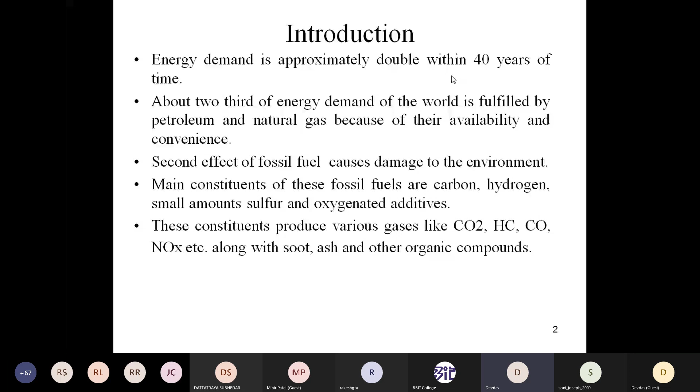We already seen about nowadays, some years before, that we were having the individual pump system in case of diesel engines. Now, since the last 4 to 5 years, all vehicles have been converted into CRDI, common rail diesel injection, which is the modification of the earlier individual pump injection system.

Second, in case of petrol engines, earlier it was a carburetor through which petrol was supplied to the engine. Since after 2000, the carburetor version has been phased out, and in its place the multi-point fuel injection system, MPFI, has been introduced. This system is now available in petrol or gasoline engines. This is the second modification we are doing.

Now the third modification. If you see the latest vehicles around 2021, like the Kia vehicles, the advanced models, the latest version of the Creta petrol, the Kia Sonet or Seltos, in the Seltos they have jumped from the MPFI system to the GDI system. GDI is gasoline direct injection system. At present, Kia, MG Hector, or the latest Creta introduce gasoline direct injection inside the cylinder, so that it controls more of the pollution.

Now, advanced emission technologies such as diesel oxidation catalyst are being introduced into the system, along with diesel particulate filters and selective catalyst regeneratives that have been developed. These are some of the factors in respect to emissions.

You already observed that this diesel particulate filter or selective catalyst regenerative system is introduced from the exhaust valve to the silencer. In between, this system is attached, particularly in the exhaust system of the engine, so that the pollutants coming out to the atmosphere have less pollutant effect.

Now, the next topic is the concept of dual fuel engine. What do you mean by dual fuel engine? In a dual fuel engine, both types of process exist simultaneously. Now the question arises, what type of process am I talking about? Both types, which both types am I talking about?

That is the carbureted mixture of air and high octane index gaseous fuels, which is compressed like a regular diesel engine. So what happens is a carbureted mixture of air and these high octane index number gaseous fuels is supplied to the engine, just like in the normal working.

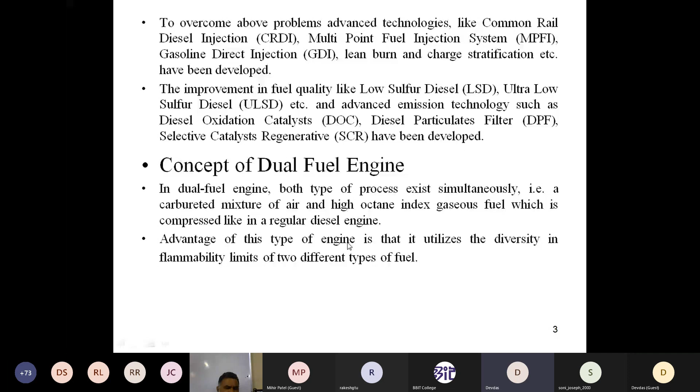This is not a hybrid. It's the mixture of LPG or hydrogen and air as one gas, and another gas is the diesel. That's why we call it the dual fuel engines. Now diesel has a different flammability limit, and hydrogen has a different flammability limit.

We can use both flammability limits in these dual fuel diesel engines. Gaseous fuels like CNG, LPG, biogas, producer gas, hydrogen, and fumigated liquid fuels like gasoline and methanol in air are used as secondary fuels. What I'm talking about is fumigated liquid fuels like gasoline. If we fumigate the gasoline, we can use this fumigated gasoline fuel as one of the energy sources.

Along with the diesel, we can use the gasoline vapor also, fumigated gasoline, along with the diesel. That's why, as I talked about earlier, lean burn and charge stratification. In case of charge stratification, we use some part fumigated liquid gasoline and some part diesel. Methanol can also be used as a secondary fuel. So many options are available now in front of us.

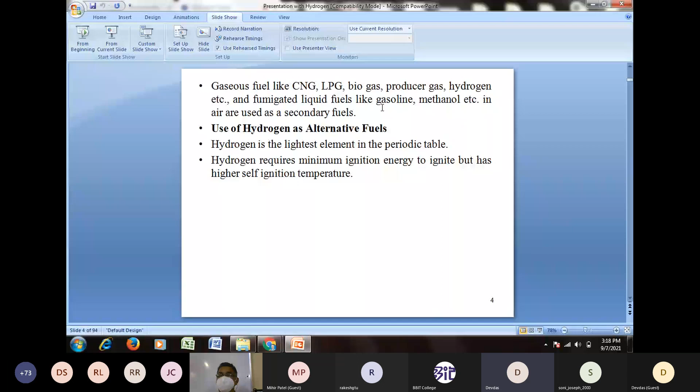Now, combustion in dual fuel design: how the combustion takes place when the liquid fuel and gaseous fuel are both simultaneously available in the engine. It consists of diffusive burning of diesel fuel and homogeneous burning of gaseous fuels, which strongly affect each other. If you know about this burning, how combustion takes place in case of pure diesel or pure petrol, yeah.

Suppose I ask you a question: which type of combustion process takes place in case of the petrol engine or gasoline engine, or in case of the diesel engine? We can call them the Otto engines or the diesel engines. We can say it like this also. You know the basic difference between the Otto engine and diesel engine.

In case of the Otto engine, it is the mixture of fuel and air in homogeneous form, while in case of diesel, it is a heterogeneous mixture of fuel and air. So this is the basic difference - one is homogeneous, second is heterogeneous.

Now in this dual fuel engine, we have the advantages of both - the mixture is heterogeneous in nature, and also homogeneous in nature. Both properties of Otto and diesel we can utilize in the dual fuel diesel engine. That's why it consists of diffusive burning of diesel fuel and homogeneous burning of gaseous fuels which strongly affect each other. It shows combined aspects of the diesel and Otto cycle. I already explained the combustion process along with unique features of dual fuel.

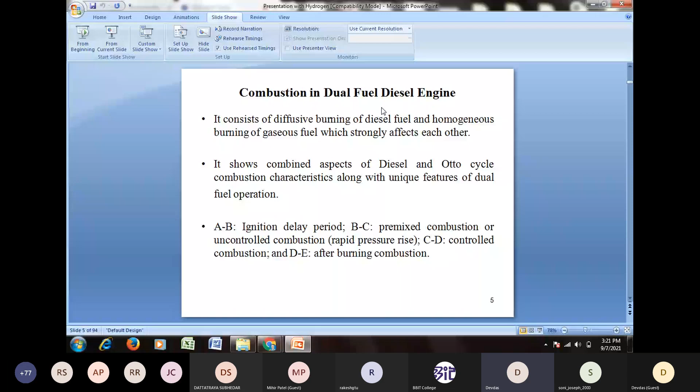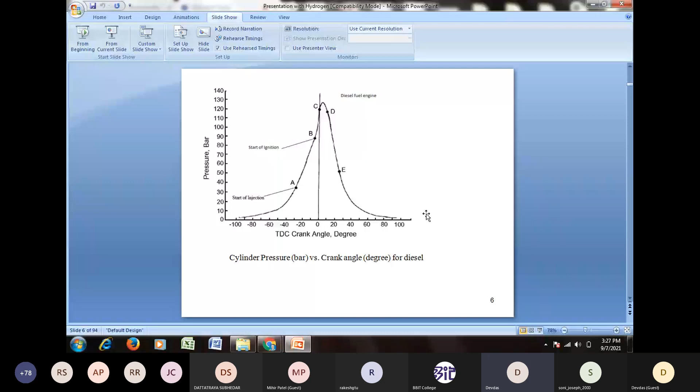On the other hand, the combustion in dual fuel diesel engines using pilot diesel fuel as an ignition source occurs in five stages. Earlier we had four stages; now here we have five stages.

First is the pilot ignition delay, which I already explained. I used the word 'pilot' here, which was not used in the previous case. Pilot fuel: why do we call diesel the primary or pilot fuel? Because diesel fuel is used to start combustion. Diesel fuel ignites first, and then it ignites whatever hydrogen gas is available inside the cylinder. I already told you hydrogen has a high self-ignition temperature, so it does not ignite on its own. We require an ignition source, and in this case diesel is used as that ignition source. That's why we call it pilot diesel, and the pilot ignition delay means the ignition delay of the diesel fuel.

Second is the pilot pre-mix combustion. By 'pilot' we mean whatever fuel, that is, the diesel accumulated inside the cylinder during the ignition delay period, undergoes pre-mix combustion.

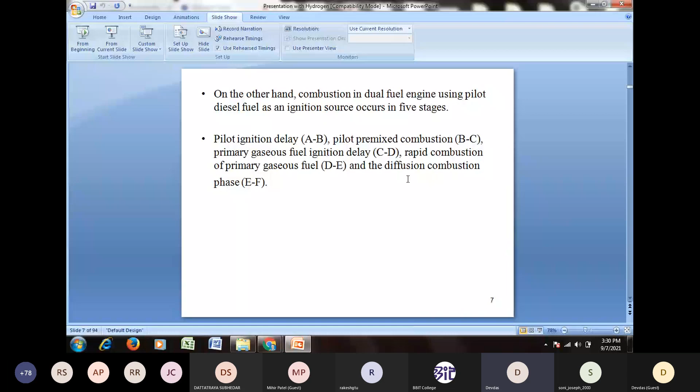Now see, A to B is the pilot fuel ignition delay, just like in the case of diesel. Diesel already takes a certain time to ignite, so A to B is the ignition delay of the diesel. B to C is the pilot pre-mix combustion.

Now C to D is the further ignition delay of the gaseous fuel, because gaseous fuels have a higher ignition temperature.

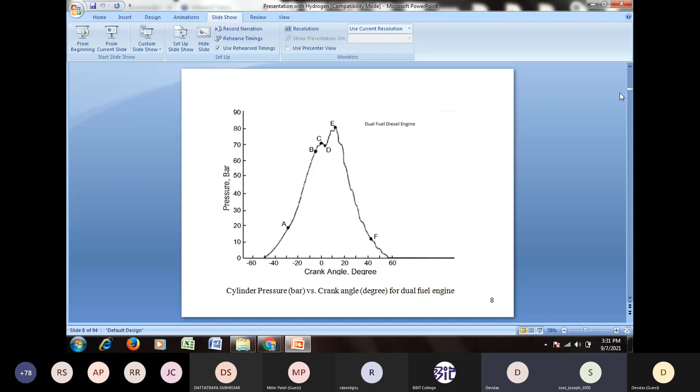Now see this, A to B, I already explained the ignition delay of the diesel fuel. B to C is the pilot pre-mix combustion.

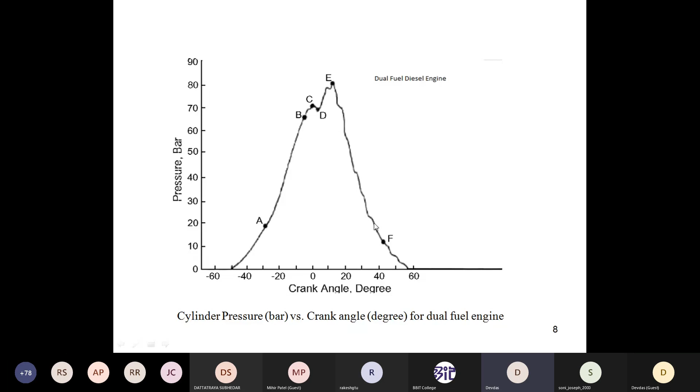E to F, again, the after burning is there. That's why B to C is one phase of combustion, C to D is the second, D to E is the third, and E to F is the fourth. So because of this, we are having five stages in case of the dual fuel diesel engines.

Now, in principle, there are three behaviors of combustion that follow in series in dual fuel diesel engines, one by one. First combustion process is the single combustion, second is simultaneous combustion, and third is the successive combustion. These are the three basic stages of the combustion.

After burning, we do not get much power, and we also do not get power from the ignition delay, so we are not contributing from it. When combustion started from point B onwards up to point E, there are three phases of combustion in between: B to C is single combustion, C to D is ignition delay, and then the simultaneous combustion and the successive combustion follow. These are the three phases of combustion in dual fuel diesel engines.

The dual fuel engines have more advantages than diesel engines. In a dual fuel engine, no modification in hardware is required in the existing engine design. Whatever the design of the engine is there, we do not need to modify it in excess.

Another advantage is flexibility, meaning we can switch back to pure diesel mode as and when required. If hydrogen is not available, we can directly shift to diesel without any effort, without any modification done into the engine.

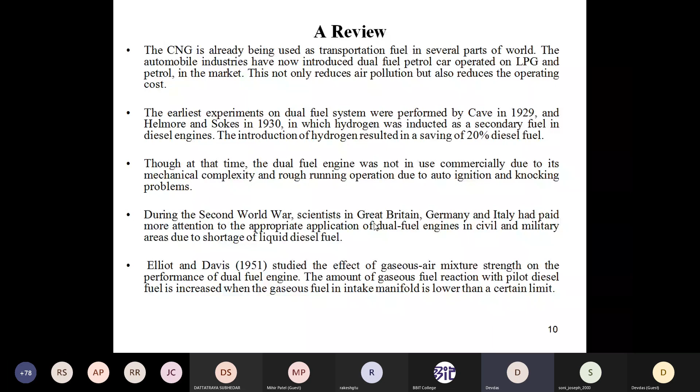Elliot and Davis studied the effect of gaseous air mixture strength on the performance of dual fuel engines. Now, what about CNG? It is a mixture of several gases. Compressed natural gas is a mixture of several gases with methane as the primary constituent, about 85 to 90% methane. The remaining constituents include ethane at an average of 78% and other components.

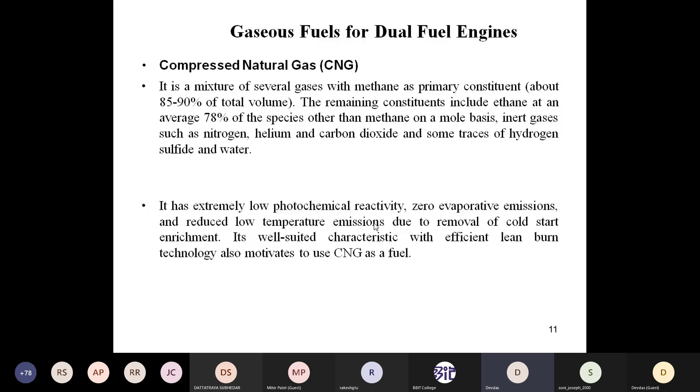CNG has extremely low photochemical reactivity, zero evaporative emissions, and reduced low temperature emissions due to removal of cold start enrichment. Now LPG has a higher octane index number, and combustion of LPG takes place practically in a uniform fuel-air mixture. Propane and butane gases are heavier than air. The most dangerous fact associated with LPG is that if LPG leaks and mixes with air, and the mixture temperature reaches 500 degrees centigrade, it becomes explosive.

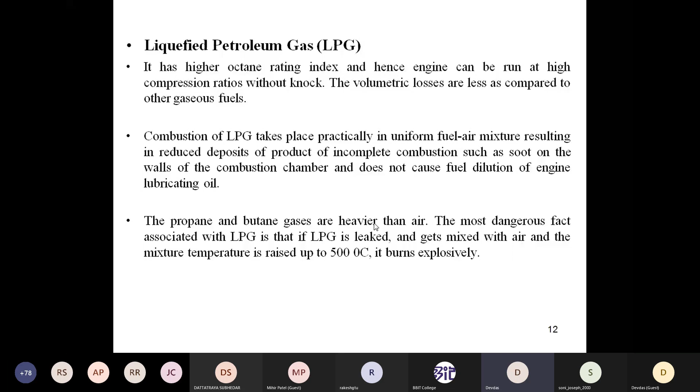Biogas, we already know about. Biogas is rich, with 55 to 70% methane, and some part hydrogen sulfide, carbon dioxide, and some hydrogen as well. The presence of hydrogen sulfide, water vapor, and halogenated hydrocarbons also worsens the quality of the lubricating oil, causing it to deteriorate.

Now, producer gas is mainly a mixture of carbon monoxide, hydrogen, nitrogen, and carbon dioxide.

It can be produced by partial combustion of solid carbonaceous fuels, such as wood, charcoal, agricultural waste like rice husk, and coke in a gasifier. This means we can produce producer gas with the help of rice husk, coke, agricultural waste, and charcoal or wood.

Now, what about hydrogen? Hydrogen has all the desired qualities of a unique fuel, all the qualities we require, which make it likely to become an ultra clean fuel, not just clean but ultra clean. From various technical and ecological points of view, hydrogen seems to be the most suitable petroleum alternative in IC engines.

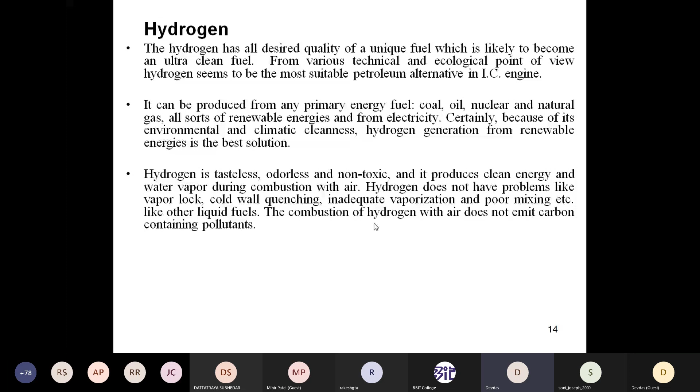Now I have compared different properties of the other gases available versus hydrogen, such as the lower heating value. See here: 42,800. Lower heating value means the calorific value. What you observe here is nearby 43,000 calorific value in kilojoules per kg.

LPG is around 46,000, CNG 47,000, producer gas only 3,500 to 6,000, biogas 20,900. In case of hydrogen, it's about 1,20,000. So much energy lies in hydrogen, 1,20,000, compared to 42, 46, 47, or only 6,000 or 20,000 for the others. We are getting 1,20,000 kilojoules per kg of energy out of it.

In this case also, for the lower heating value by volume, hydrogen is about 2,570 while CNG is about 36,000. This is in terms of volume and normal metric conditions.

We can also see auto-ignition temperature and the flammability limit: 0.6 to 7.5 for diesel, LPG 2.1 to 9.6, and here 4 to 75 percent. This means, by volume percentage in air, if hydrogen is present at 75% in a fuel-air mixture, it can still ignite, but other fuels do not ignite at that level.

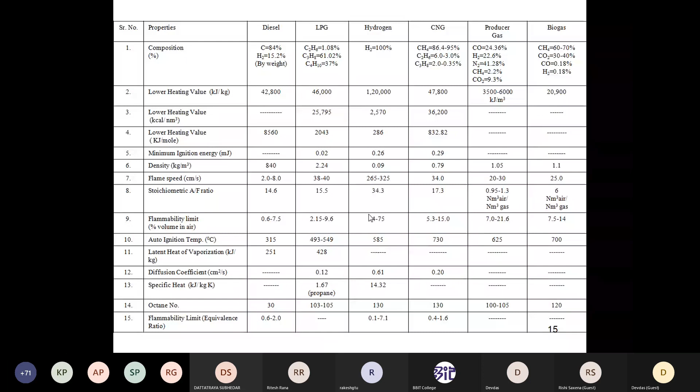Then, how do we assess performance? How do we show that hydrogen is useful, and how do we compare the dual fuel engine to show it gives better performance? Not just by discussion, but by going through experimental work. So we also carried out experimental work on this.

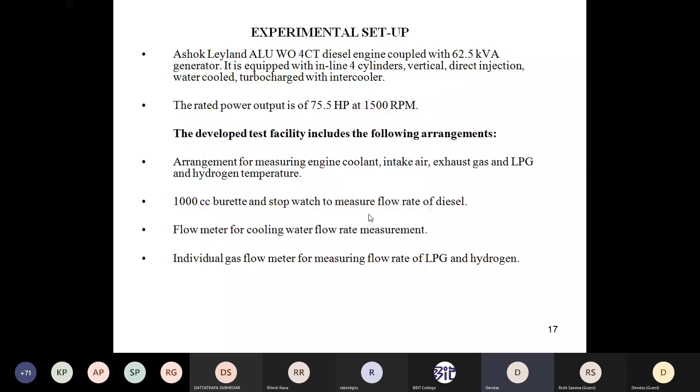Then the hydrogen goes inside through the air inlet system. Air comes in from this side, and hydrogen is fed in, where it mixes with the air coming from the inlet manifold. This mixture then goes to the engine, and from the engine it goes out through the exhaust.

We can use the exhaust emission method to measure the exhaust. So these are the setup details for this system.

So whatever data is there gets saved in the computer, and from the computer we get the readings and all the things. So this is the basic arrangement of the hydrogen system.

Now what is there? This is the hydrogen. The red one is the hydrogen cylinder. From this hydrogen cylinder, hydrogen is coming.

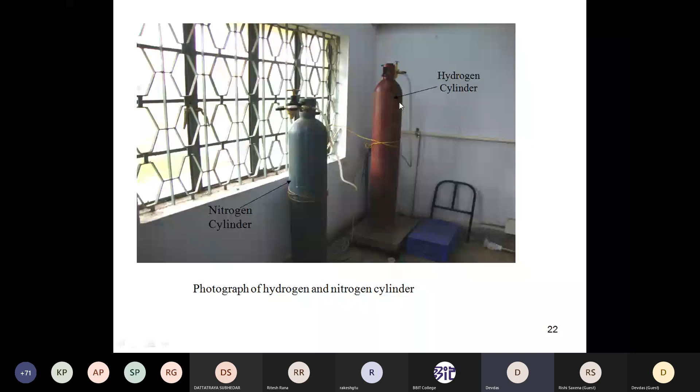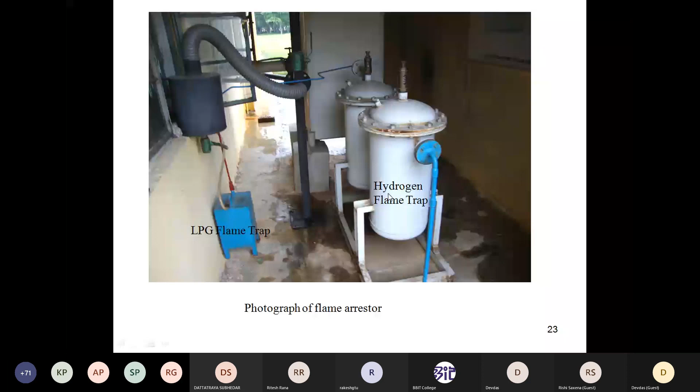Now, hydrogen is coming to this flame trap. This is the flame trap that we call the hydrogen flame trap. From the hydrogen flame trap, it goes to the meter. We are measuring the amount of hydrogen we are supplying into it. This is the volume flow meter of the hydrogen.

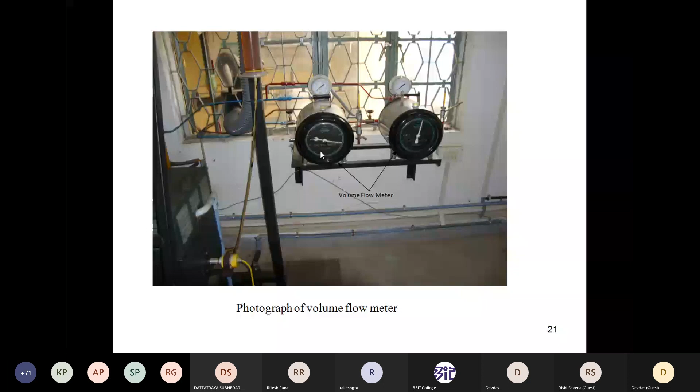Then this is the engine into which we are supplying it. This is the flame arrestor, the blue one. This blue line is the pipeline through which the hydrogen is coming and inserted into the engine. And look, this is the inlet manifold. We are injecting hydrogen in the inlet manifold, and from the inlet manifold hydrogen goes to the engine and the engine gets started.

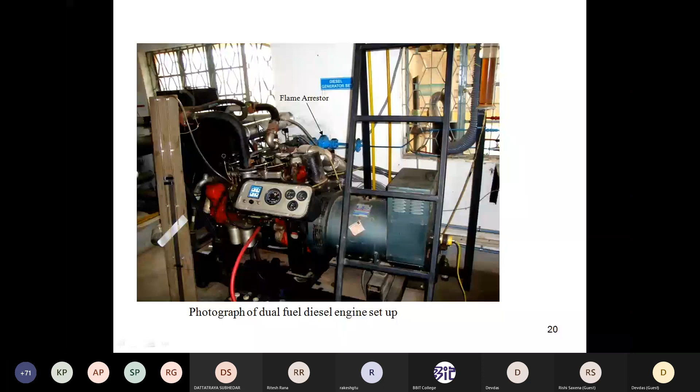This is the pressure transducer charge amplifier. This is the four cylinders, 1, 2, 3, 4. This is the pressure transducer in between it. This is the form of it.

How did we do the experiment over it? First, we ran the engine with the help of pure diesel only. What were the performance parameters of the diesel engine? The diesel engine shows we can note down readings with respect to fuel consumption, with respect to load, with respect to the pollution coming out, all with respect to diesel.

Then we consider diesel plus hydrogen. In case one, the engine runs with diesel engine only. In case two, the engine runs on diesel as the primary fuel and hydrogen as secondary. So in the second case, hydrogen is also used as a secondary fuel, while in case one only diesel is used as fuel.

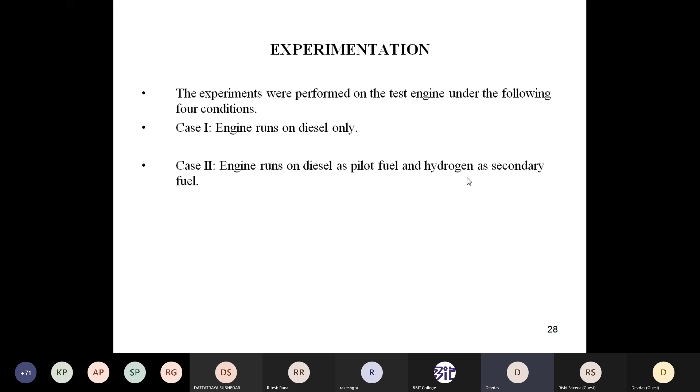At what load percentage are we using diesel and hydrogen, or how much percentage of hydrogen are we supplying? From 5% to 50% hydrogen we are supplying. Why not go beyond 50% hydrogen? Because if the percentage of hydrogen intake is more, then the problem of knocking arises. The knocking problem becomes more severe, hence we restrict the percentage of hydrogen up to 50%. Otherwise, knocking damages the engine, so that is never desirable.

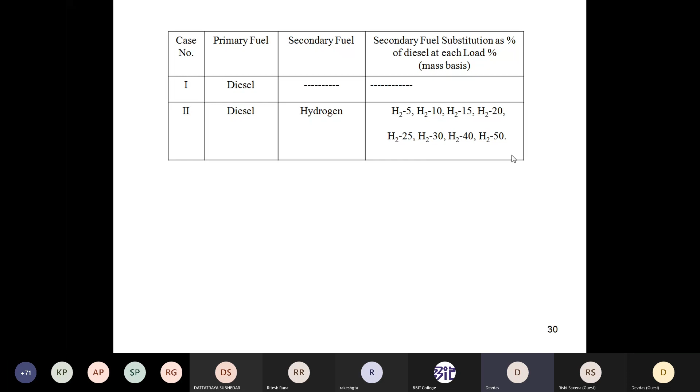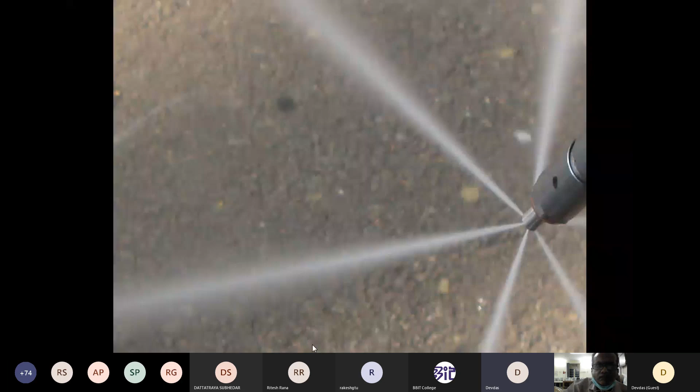Now, when the diesel goes to the intake, I have made a pictorial picture of the diesel. This is the spray, called the spray zone, where diesel is injected inside the cylinder. How does the diesel get separated into different zones? This is the center, with an elliptical shape that we call the core shape, where diesel is available in liquid form.

Now, surrounding this, what happens? Part of the diesel gets vaporized because of the heat available inside the cylinder. It is surrounded by the core fuel. In the premix diffuser region, the vaporized fuel gets mixed with the surrounding air nearby the injector, so they mix together.

After that, what happens? The propagation of the gaseous fuel also takes place. The gaseous fuel also catches fire. And what happens is the propagation of the gaseous fuel-air mixture - it gets propagated inside the cylinder, the flame gets propagated inside.

This portion is the end portion of the charge which is yet to be burned, that's why it's called the unburned gaseous fuel. As the flame increases, it moves from this side to this side, and this gets compressed because of the high pressure developed by the combustion of fuel inside the cylinder.

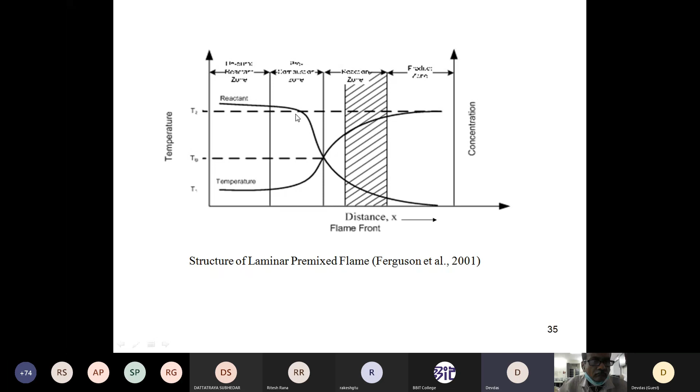Now, what I already told you about the ignition delay - then how do we begin the ignition delay here?

Ignition delay is nothing but the gap between the start of injection and the start of combustion. That gap is called the ignition delay. Now, how do we calculate that?

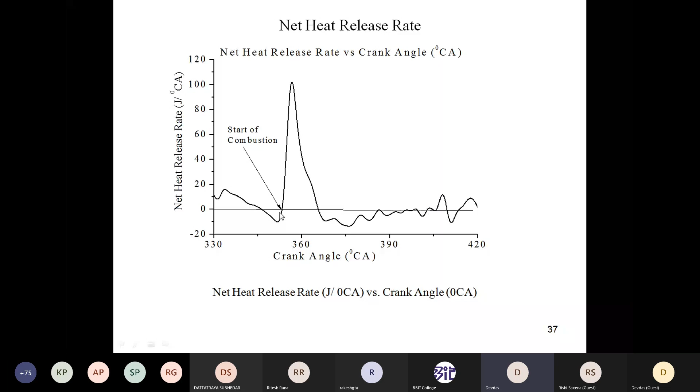So we can calculate the start of combustion by means of the rate of pressure rise, and also by means of the net heat release. In this case, it's not the minimum point but the zero point — from here to here, where the zero point comes, the start of combustion is there. While in the other case, the minimum point is used as the start of combustion.

From here we can get the thermodynamic analysis. As a mechanical engineer, you'll know that the polytropic index comes into the picture because the compression process is not isentropic — a certain amount of entropy changes, so the process is polytropic. Then how do we calculate it? On the basis of the polytropic index, we find the polytropic index of the situation inside the air.

The polytropic index can be measured from the start of combustion to the end of compression. During the compression process, we measure the slope of the process to use as the polytropic index.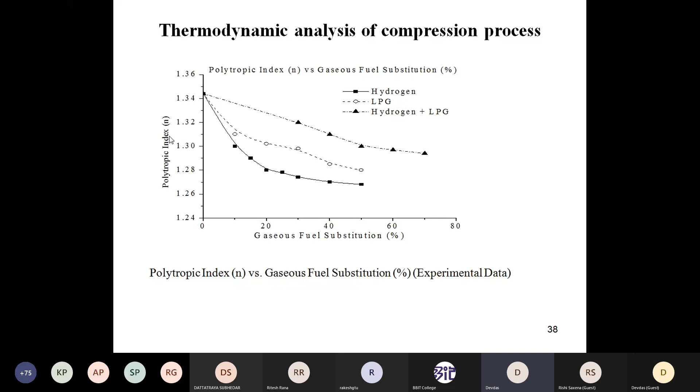We observed that the polytropic index is nearby one, more than 1.34 and just below 1.36. But in all cases with hydrogen and LPG, hydrogen plus LPG, we observed that the polytropic index gets reduced — it decreases.

Now, how do we calculate the linear regression analysis? We can mathematically calculate the ignition delay, and also calculate the mean temperature developed inside the cylinder with this formula. We have the pressure from the pressure transducer, and with the crank angle position, we can calculate the temperature or volume of the system. So we calculate the temperature using the pressure and volume, and get the temperature inside the cylinder.

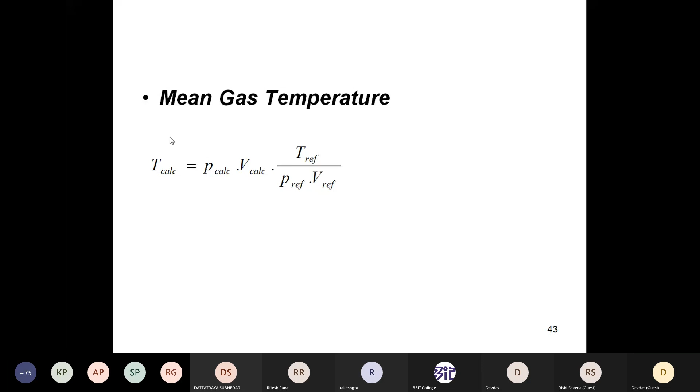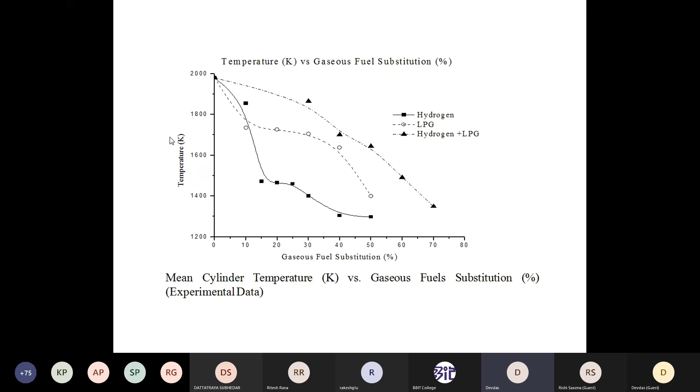We observe that the cylinder mean temperature gets reduced as the gas substitution increases, because as the polytropic index reduces, the temperature of the gas also gets reduced. We also observe that the pressure gets reduced as we work with gas substitution.

The oxygen concentration — because we replace the air with the help of hydrogen — what are the effects of hydrogen substitution on oxygen concentration? We observe that the oxygen concentration gets reduced as the percentage of hydrogen increases. The addition of hydrogen replaces the air, so the quantity of air supplied inside the cylinder is less, which indicates that less oxygen is available inside the cylinder.

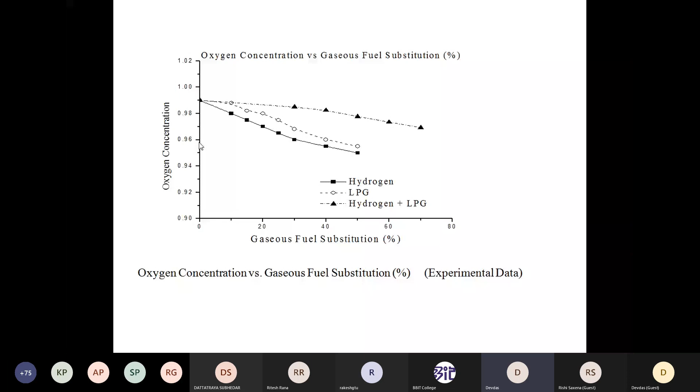Regarding ignition delay: after a certain time, ignition delay increases, then it reduces. From the diesel, the ignition delay increases, then it reduces here.

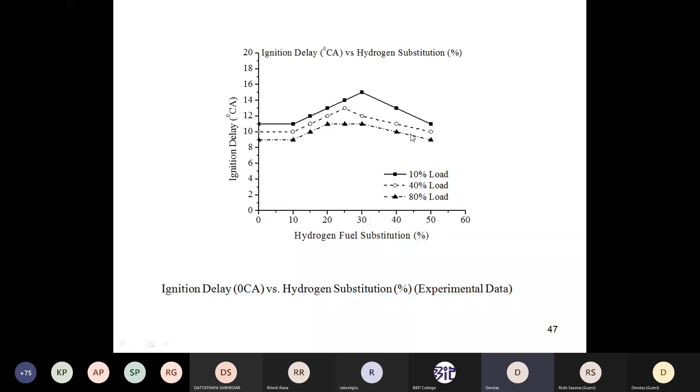Now at low load condition, the brake thermal efficiency for case 2 means the mixture of hydrogen and air. Why does it indicate that at low load conditions, the brake thermal efficiency for case 2 as well as case 3, case 1 operations are low? At low load condition, a small pilot fuel quantity makes a lean flammable mixture. Unburnt gases remain in the mixture and the rise in temperature of the unburnt charge in the burnt zone does not reach up to the ignition temperature. Hence, reaction rate in the reacting zone of the flame front is slow. Thus, gaseous fuel-air mixture is partially oxidized in the reaction zone where combustion takes place. Therefore, accumulation of unconverted gaseous fuel and carbon monoxide increases due to incomplete combustion.

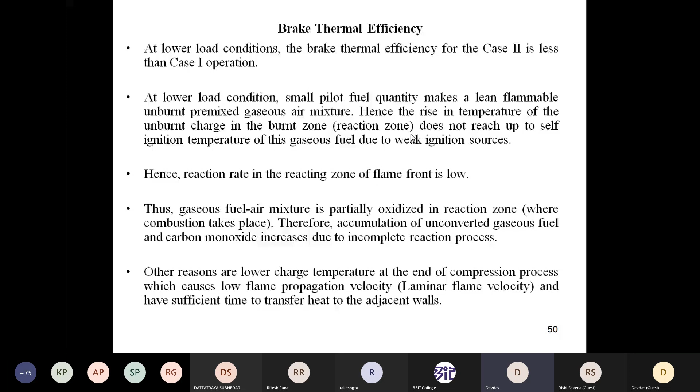While in case of gaseous fuels, if you compare, what you observe is why this is so - this is due to the large quantity of pilot diesel fuel that leads to a stronger ignition source. This reduces delay period due to uniformity in mixture formation, which accelerates the pre-flame reactions and hence gives more complete and rapid combustion of the fuel. Because of that, the efficiency is more.

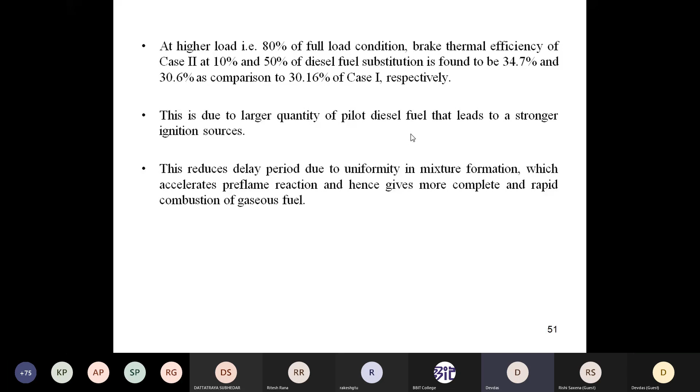BSFC, we already know that BSFC is the inverse of the brake thermal efficiency. As brake thermal efficiency increases, this gets reduced. At a certain load condition, the brake specific fuel consumption gets lower as compared to that of diesel also.

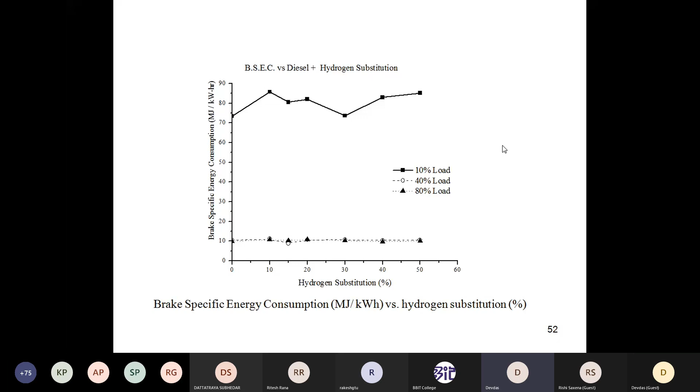Now, brake specific fuel consumption is an important parameter for the performance of the engine, which shows its ability to convert fuel into work. At 10% of load condition, the fuel consumption is 33% higher than the pure diesel engines. Meaning at low load condition, the fuel consumption rate is 33% more than the pure diesel engines. This we like to note.

The temperature of the charge at the end of compression is the most critical parameter for initiation of combustion in CI engines. The presence of hydrogen increases the heat transfer rate and hence cooling effects are there. Cooling losses are more. The pilot diesel fuel does not get sufficient time to complete pre-flame reactions. Therefore, in order to produce the required power, a large amount of diesel was supplied.

What I say is that the fuel, hydrogen, we can control - supply of hydrogen is in our hands, we can control according to the need. But what about diesel? Diesel is automatically controlled by itself depending on the speed of the engine and depending upon the load on the engine. So the amount of fuel can be automatically controlled by the pump there. That's why they mention the pilot diesel does not get sufficient time to complete pre-mixed, pre-flame reactions. Therefore, in order to produce power, it is supposed to have sufficient time to complete pre-flame reactions.

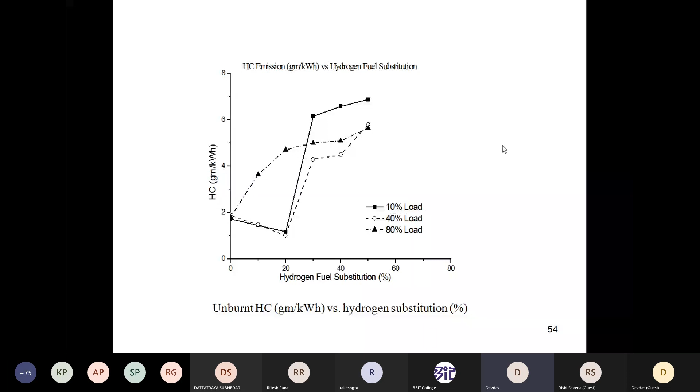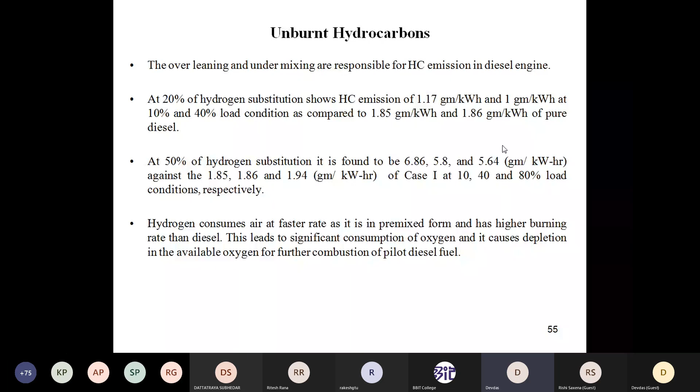Hydrogen consumes air at a faster rate as it is a premixed form and has a higher burning rate than diesel. This leads to significant consumption of oxygen, and since it consumes oxygen at a faster rate, the oxygen available for the pilot fuel is reduced. The same graph applies here.

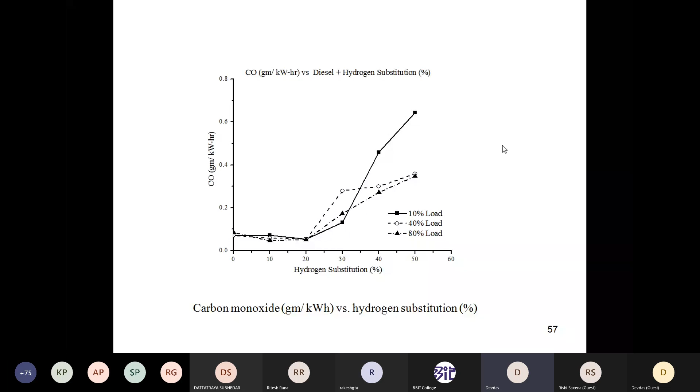The carbon monoxide - what you observe is that the carbon monoxide percentage, after a certain time, gets increased when hydrogen is used. The same logic applies because the formation of carbon monoxide depends on post-oxidation reactions. For very lean mixtures, some of the CO may not be utilized or oxidized further due to failure of the combustion process to cover the whole charge, and relatively slow reaction process. These are the responsible factors for carbon monoxide production.

Initially, the percentage of CO is reduced up to 20% of hydrogen substitution, then it increases sharply at all low load conditions. If hydrogen percent is low, then CO formation is also low. The CO emission at 80% load conditions due to 20% hydrogen substitution is found to be this much. These are the values obtained after that.

The higher concentration of hydrogen makes the gaseous air mixture richer due to replacement by hydrogen in the intake. As soon as ignition starts after the ignition delay period, spontaneous combustion occurs in a higher percentage of hydrogen. Hence, the diesel fuel is further subjected to higher combustion temperature in an atmosphere of shortage of oxygen. This leads to fuel cracking and production of carbon monoxide.

The excess availability of air, as in case 1, reduces the reaction rate due to reduction in temperature.

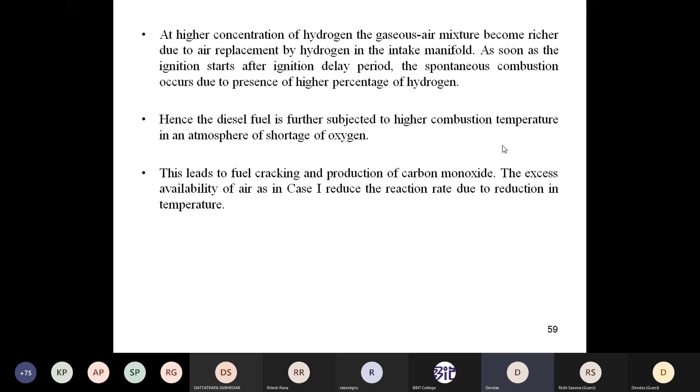This CO result leads to NOx, and how does NOx formation take place? HO2 plays an important role in enhancing the conversion of NO to NO2. HO2 radicals can be formed by H plus O2 plus molecules.

The HO2 rich mixture reacts with NO molecules in high temperature combustion regions and enhances formation of NO2. So NO2 is obtained when the HO2 rich mixture reacts with NO molecules from the high temperature combustion regions, enhancing the formation of NO2.

At a suitable temperature, the unburned fuels containing hydrogen could oxidize in the presence of O2 and form HO2. These are the processes by which NOx formation takes place inside the cylinder.

NO formed in the flame zone can be converted to NO2. Why does this happen? As a result of negative activation energy and low concentration of HO2, the rate of NO2 formation changes very slightly, in spite of the substantial increase in the concentration of NO.

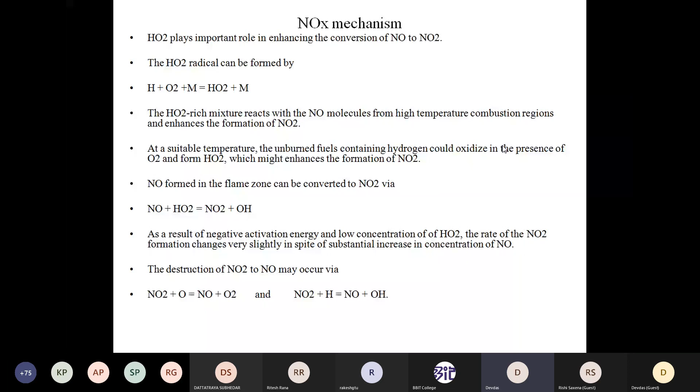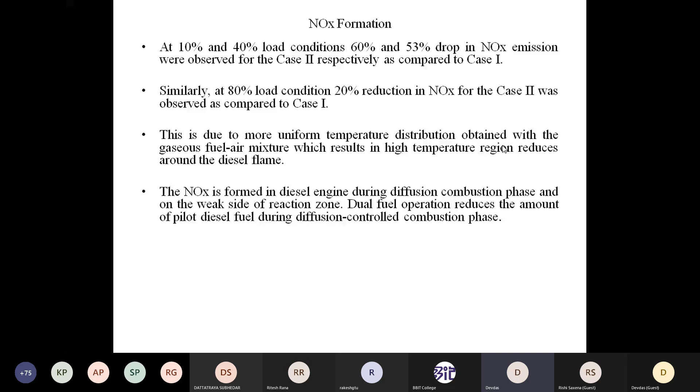Now smoke: in all cases, we observe that smoke gets reduced when we use hydrogen in the system, because hydrogen does not contain any carbon. So there is no question of carbon-based formation.

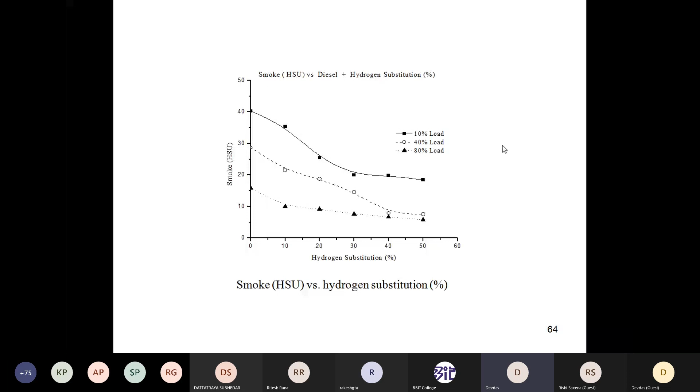Smoke basically consists of combustion-generated carbonaceous material, like soot, on which some organic compounds are adsorbed. This is the important part of it. It is from incomplete combustion of hydrocarbon fuels and some amount of lubricating oil. The heterogeneous and diffusive mode of combustion are responsible for smoke formation in diesel engines.

Now there are certain combustion parameters, depending on how combustion takes place inside the cylinder. These properties include ignition delay, maximum rate of pressure rise, peak cylinder pressure, net heat release rate, heat release rate in the first phase of combustion, and combustion duration. All these are the combustion parameters, and now we are going to see them one by one.

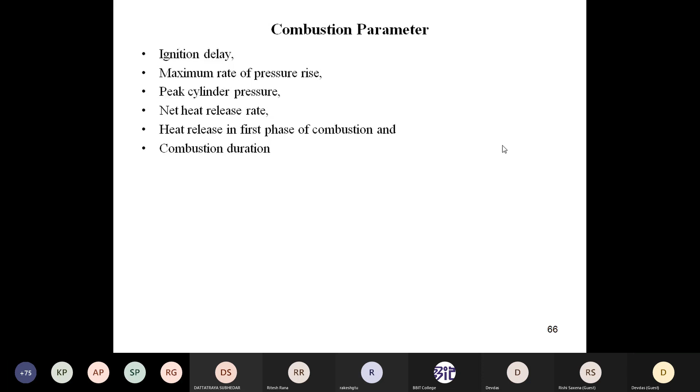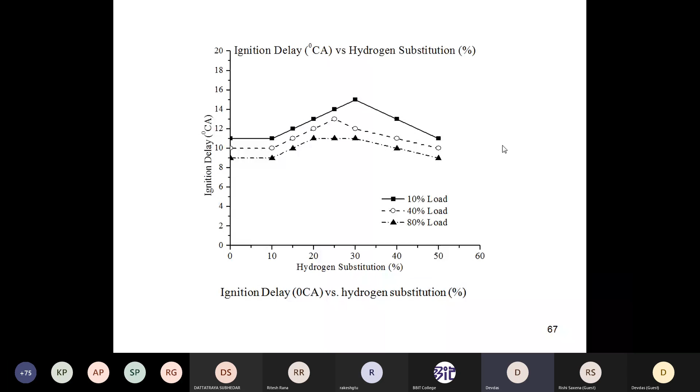We already discussed ignition delay. Ignition delay increases initially due to the formation of intermediate compounds during the compression process from partial oxidation of the air-gas mixture. These are the reasons why ignition delay gets affected, more so than in diesel engine operation, because of the formation of intermediate compounds.

During the compression process, the mixture of air and gases gets compressed, and as the pressure and temperature of the hydrogen increases, certain intermediate compounds are formed.

This is caused by the loss of very reactive OH radicals in reactions with molecular hydrogen, which produces less reactive species that are not capable of accelerating reactions at the same rate as OH. These are the reasons for the ignition delay.

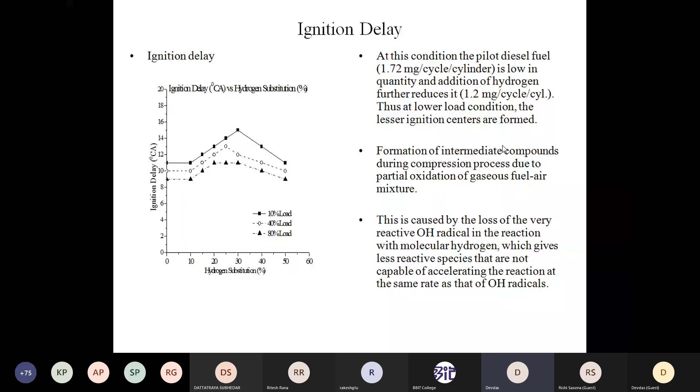Due to the loss of OH radicals, the heat transfer rate to the combustion chamber wall in case of hydrogen substitution is more, due to higher thermal conductivity. Hydrogen gas also has high thermal conductivity, so heat losses are also more.

One minute please, my battery went down again. The light here has gone, there's a light problem, no electric connection is there. The battery issue is there, I think the light connection is not here. Electricity problem is going on.

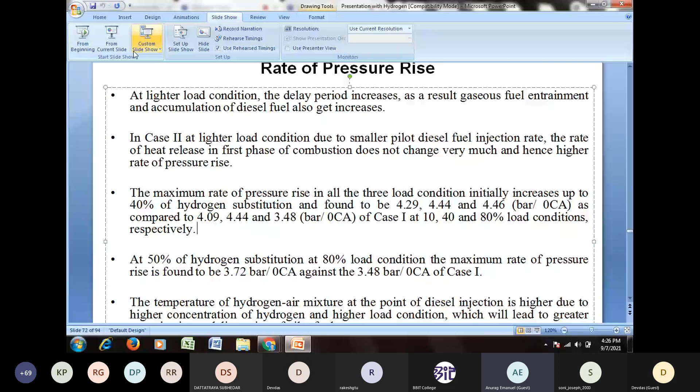Okay sir. Yes sir, we can hear you, now we can continue sir. Yes sir, we can see your screen and hear also. Just a request that you make your presentation a slideshow, full screen. Press F5 or select slideshow sir. Okay sir, yes sir, make the window full and go to slideshow below. Yes it will work, custom size. Yes sir, done. Okay, thank you sir.

Sir, we are talking, sorry for that sir, it happened due to an electricity problem. Sorry for it. No sir, that's okay, you can continue sir.

Now I'm going to discuss the maximum rate of pressure rise. What you observe here is that this is diesel, this is the zero line base spot where only pure diesel is there, and this is the substitution of hydrogen. As the substitution of hydrogen increases, the rate of pressure rise also increases. This is 10% load, this is 80% load condition. Initially the rate of pressure rise increases as hydrogen substitution increases. After a certain period, after 30 to 40% of hydrogen substitution, it drops - there is a drop in the rate of pressure rise.

At a lighter load condition, the delay period increases. Why is it so? At a light load condition, delay period increases, as a result gaseous fuel entrainment and accumulation of diesel also increases. This is the light load, 10% load condition, where it increases initially. This is because in Case II at lighter load condition, due to smaller pilot diesel fuel injection rate, the rate of heat release in the first phase of combustion does not change very much, and hence there is higher rate of pressure rise.

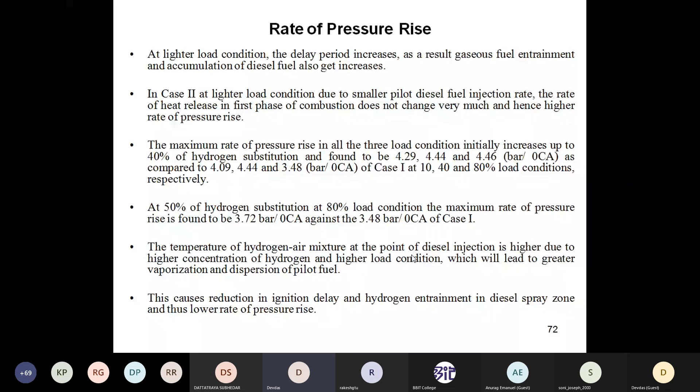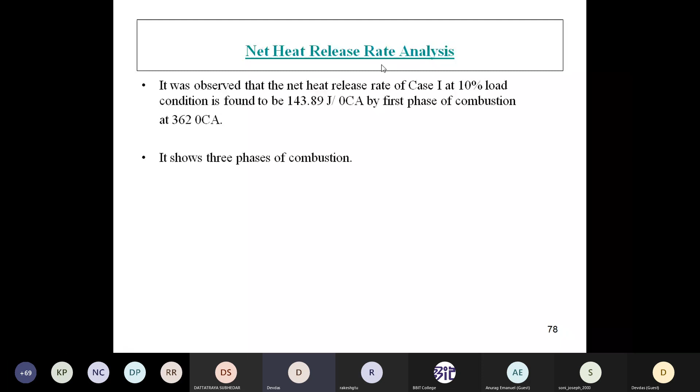Now, how much heat gets released from the combustion? I already told you there are three phases of combustion: the single combustion, successive combustion, and the simultaneous combustion. Now we can see, in case of net heat, how much heat gets released out of it.

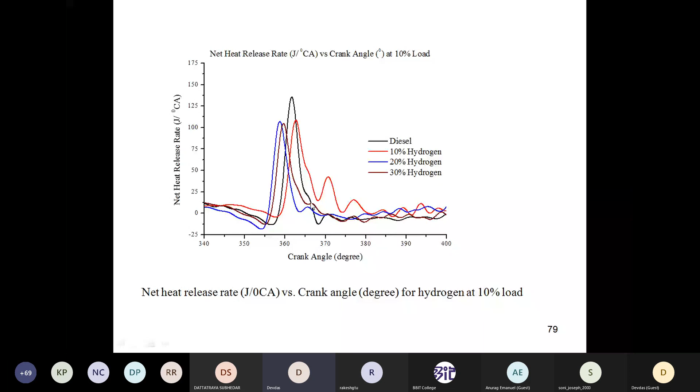Just to see about this black one. This black one is diesel. In case of the diesel, only this drop is there, only this move up, again it moves up. So this is only one big phase, and a slightly second phase is there.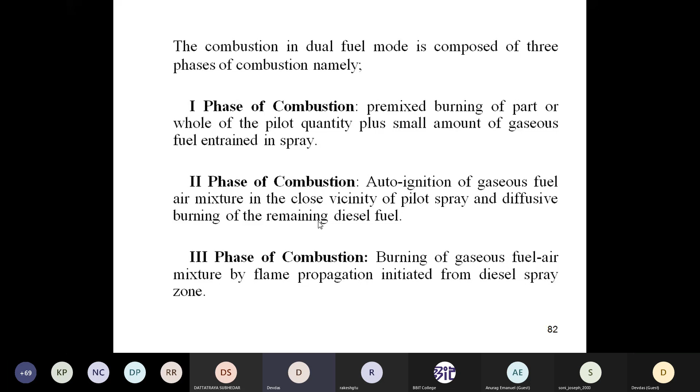While in case of diesel dual fuel, we have distinctly three phases of combustion. The first phase is premix burning of part or whole of the pilot fuel quantity plus a small quantity of gaseous fuel entrained in the spray. The second phase is auto ignition of the gaseous fuel-air mixture in close vicinity of the pilot spray, and diffusive burning of the remaining diesel fuel. The third phase is burning of the gaseous fuel-air mixture by flame propagation.

I already told you in earlier slides that both combustion processes exist. In case of the petrol or Otto engine, the mixture is homogeneous and the flame is propagated inside the cylinder. While in case of the diesel engine, the mixture is heterogeneous and the heat is not moved in the form of propagated flame. But in case of gaseous fuel, the flame also gets propagated and heterogeneous combustion also takes place. The heat release rate reduces at different load conditions.

As the hydrogen substitution increases, the heat release gets reduced. Now, the combustion duration - how much time duration is there? Combustion duration is how much time is required for the burning combustion process to be complete.

The combustion duration can be calculated from the mass fraction burn curve and cumulative heat release rate. Two aspects of the mass fraction burn curve are used to characterize ignition delay, with the help of which we can calculate the ignition delay and also the combustion duration.

Ignition delay is defined on the basis of the mass fraction burn curve as the angle between the time of injection and the time at which 1% of the mass fraction burns. That is, we know the time of injection, and the difference between the angle of time of injection and the 1% mass fraction burn point.

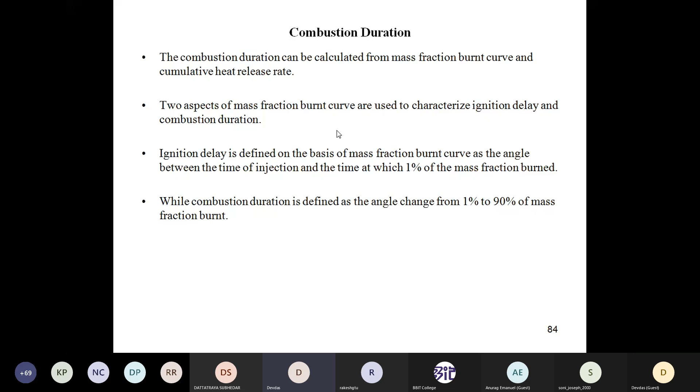The cumulative heat release is calculated by integration of the net heat release rate. The minimum point in the cumulative heat release gives the start of combustion. During the end of combustion, the heat transfer to the cylinder walls becomes larger than the heat release from the combustion process, which is indicated by a drop in the cumulative heat release rate.

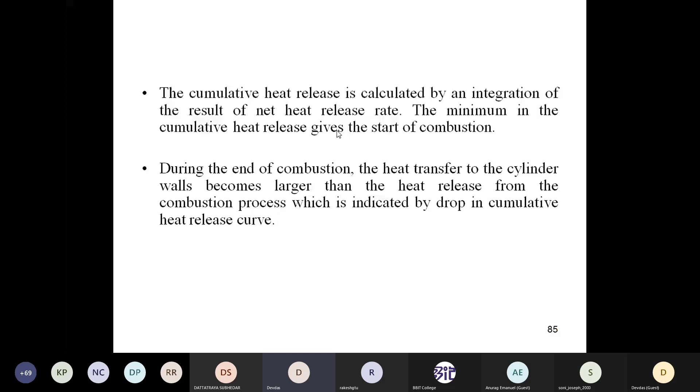Now you will just see about this cumulative heat release rate. The graph is like this - we go like this and it moves up like this.

Now, combustion duration means what? From this point, the lowest point, to this point, where the drop of the graph takes place. So this is the combustion duration, and this point is the start of combustion.

This point is the start of combustion. This point is where 90% of the fuel burn takes place - 90% of the fuel gets burned here. So we call this the combustion duration - this angle, from this angle to this angle, we call the combustion duration.

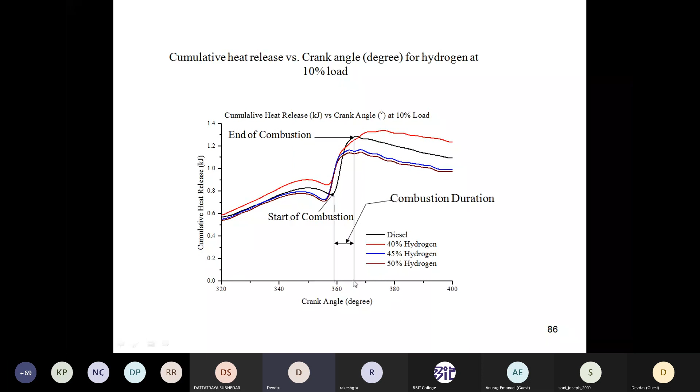Now, regarding combustion duration - as the hydrogen substitution increases, the combustion duration gets reduced. Combustion duration means that in a very short time angle, the whole fuel can burn, and because of that, we get more power output.

Now we compare the combustion duration with respect to brake thermal efficiency. Brake thermal efficiency increases here - this is the 80% load condition. Brake thermal efficiency of pure diesel is only 30%, while it increases beyond 30% in case of the hydrogen engines.

And this hydrogen substitution at the 80% load conditions, combustion duration reduces. This means when the combustion duration is low, my brake thermal efficiency is more. My combustion duration is low, my brake thermal efficiency also increases. This is the correlation between combustion duration and brake thermal efficiency. If instantaneous combustion takes place, my brake thermal efficiency is very, very high.

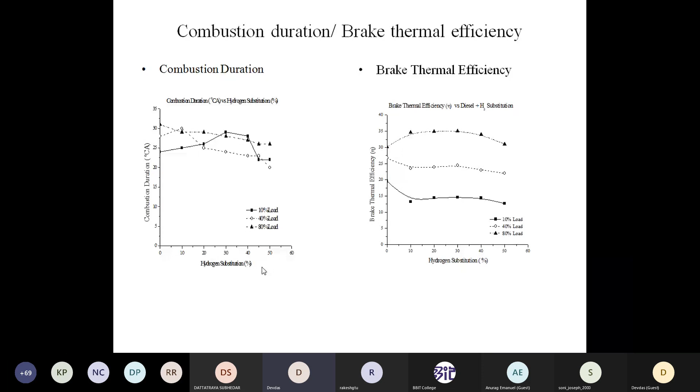So this shows the reason hydrogen behaves this way. Hydrogen has a strong buoyancy and diffusivity. Correct? Then LPG has a lower flame speed.

The combustion process in a dual fuel diesel engine depends on the spray and ignition characteristics of the pilot diesel fuels, and the type and overall concentration of the gaseous fuels. The combustion energy release characteristic in a dual fuel diesel engine reveals relatively complex physical and chemical interactions that take place between the combustion process of the two different fuel systems.

However, the chemical kinetics of the diesel fuel and its chemical interaction with the gaseous fuel components are too complicated, and at this moment it is not clearly understood how the chemical kinetics takes place inside the cylinder.

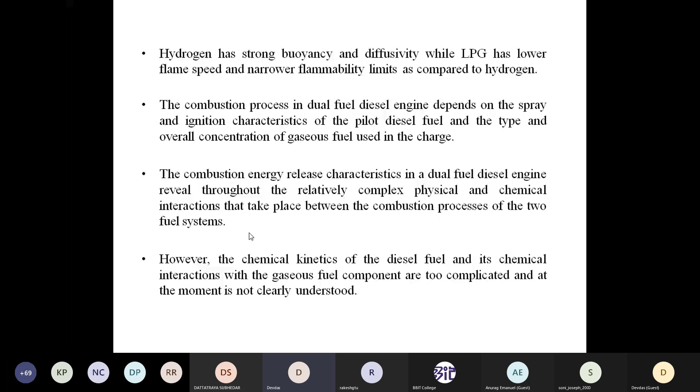Now the last part is the conclusions. When we use hydrogen as secondary fuel, substitution of diesel by 30% hydrogen enhances the brake thermal efficiency by 17%. We substituted only 30% of the diesel by means of hydrogen, and we get 17% more efficiency than the diesel engine.

At low load conditions, of course, brake thermal efficiency is low. At higher load conditions, there is a knocking problem. So brake specific energy consumption at case 2 is high at light load. Severe knock was observed.

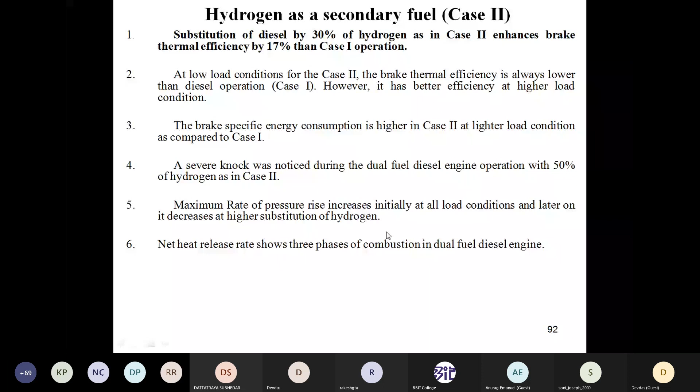The first phase of combustion in case 2 is less than case 1, pure diesel. Case 2 is diesel plus hydrogen. Net release first phase of combustion is less than case 1 operation due to higher premixed combustion.

Ignition delay at low load condition is more. Ignition delay is less in case of higher substitution of hydrogen. At 80% load condition and 50% hydrogen substitution, the combustion duration is reduced by 5-degree crank angle, which is less than the diesel operation.

So this is the advantage of this. So this is my presentation. Sorry for the electric problem I faced.

So if any questions are there, you may ask any doubts or any questions.

Yes sir, on behalf of my friend Vineet Modi, he has asked a question. The question is, what changes are required in engine design while using dual fuel with hydrogen?

Basically, we do not have to modify anything in the hardware of the engine. We only inject the hydrogen in the inlet manifold of the engine, where the air goes inside the cylinder. Along with the air, we are supplying the hydrogen inside it. So we do not need any modification in the engine as such.

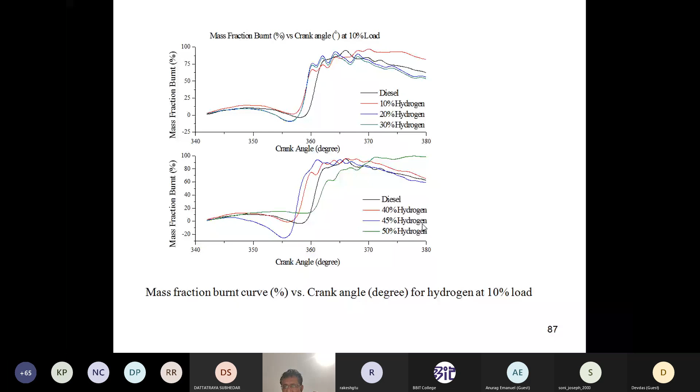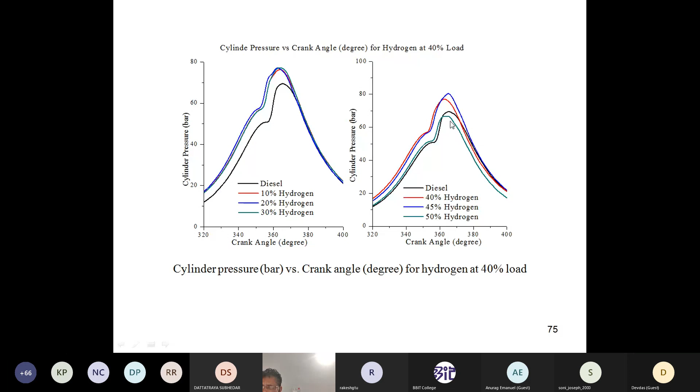If you compare the petrol engine and the diesel engine, this is only because of the pressure rise that takes place inside the cylinder during the premixed combustion. Whatever sound comes out from the diesel, you already observed that the diesel engine gives more sound compared to petrol engines. That is because of the higher pressure developed inside the cylinder during the premixed combustion.